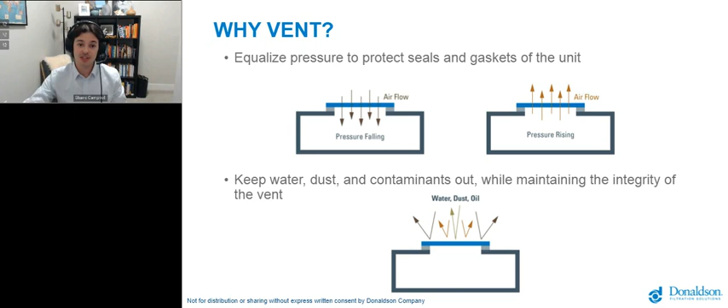So why vent battery packs? With battery packs, there are two ways that you can build up pressure inside the pack. The first being from temperature change during charging or discharging the pack. The battery will heat up quite a bit, or also during elevation changes, you can get pressure differentials.

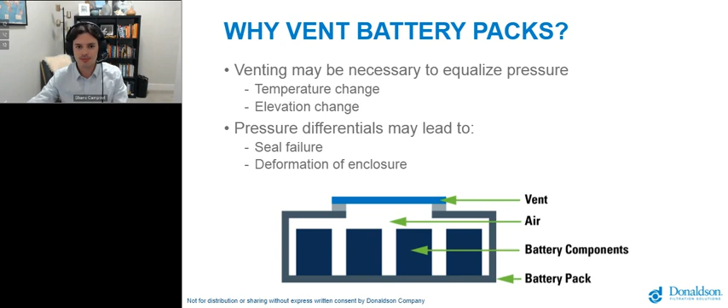If you don't have a vent on there, it'll either create high pressure or a low vacuum condition, and that may lead to seal failure or deformation of the enclosure, which then could cause failure of other components. So with robust venting, we're able to help decrease the risk of component failure and also seal failure.

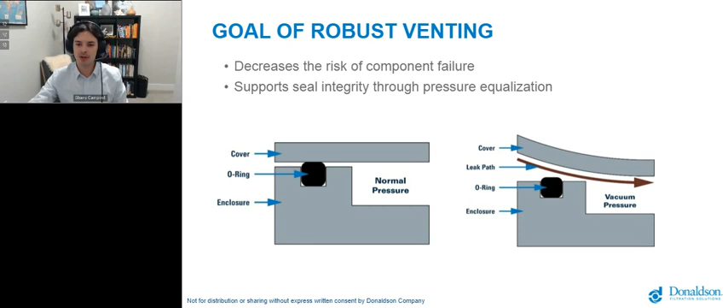In the diagram on the screen here, you see during normal operation, everything's sealed how we expect it. But if there is not a vent present and you create a vacuum condition, the cover can deform, creating a leak path around the O-ring or seal. So this is what we're trying to avoid, and the reason why we add vents to battery packs.

One use case we've been seeing a lot lately related to EV battery packs is all about the weight of the components present. We know that the battery pack is one of the heaviest, most expensive EV components, and one way to reduce this is to use thinner walls, especially the lid component. But with this, you also get a lower maximum pressure that the pack can handle.

So with venting, we're able to do two things. One, reduce the pressure that the pack sees during normal operation. And second, we're able to help keep that enclosure at a suitable pressure throughout its lifetime.

So it has a lot of really small nodes and fibrils which capture particles, and then through a combination of the material properties of PTFE and the oleophobic coating we apply to it, it repels both water and oil, while still allowing airflow to pass through.

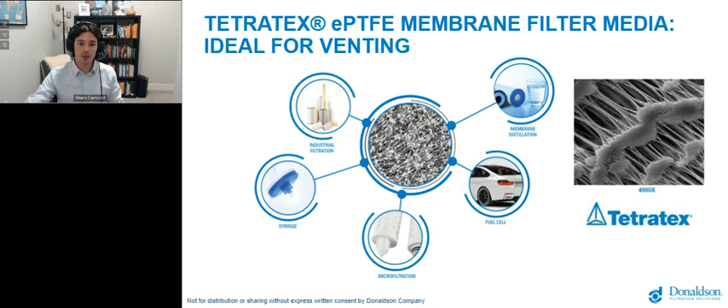This material is also used at Donaldson across other business units as well, for different filtration needs.

So now looking a little bit closer at automotive battery packs and some of the unique challenges we face with these, the first being thermal runaway.

Thermal runaway happens when there's an uncontrolled discharge of current within the battery pack. During this event, there's a rapid release of both gas and an increase in temperature, so we need a way to release this pressure quickly. The ePTFE membrane by itself is too restrictive to handle this amount of venting.

So we need some secondary function, and we call that active venting, which is the second stage of dual stage venting.

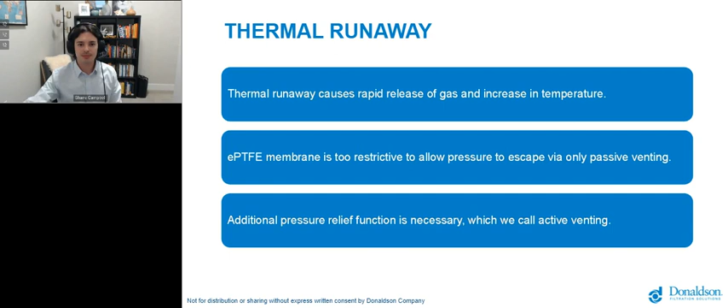At Donaldson, we have two ways that we're able to achieve dual stage venting. The first stage is airflow through the membrane, that's pressure equalization. But the second stage, degassing, can happen in one of two ways.

The first being burst. Our product, dual stage burst, has a membrane where as pressure rises inside the pack, it pushes on the membrane, and with the assistance of pins on the cap, the membrane bursts at a specified pressure.

The second method is dual stage flex. As pressure is rising, building up inside the pack, it pushes on the vent, and we have an umbrella valve in there, which also opens at a specified pressure, allowing rapid degassing of the battery pack.

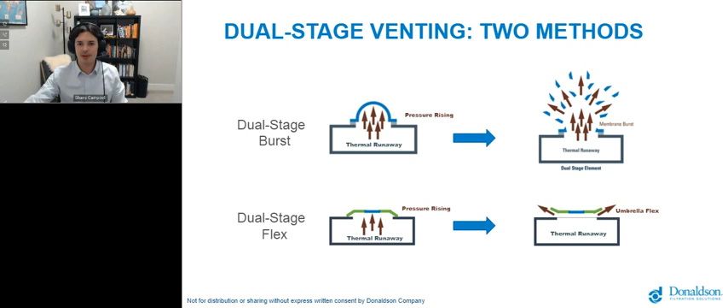So now we're going to play a video that highlights both products.

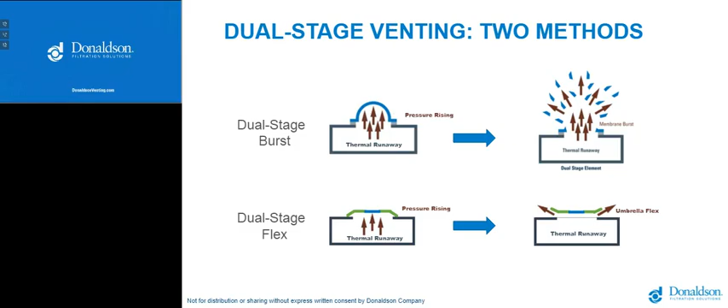All right, so from that video, there's a couple things that really stand out to me. The first being that dual stage venting is possible with two different methods. Whether you use a burst membrane or a flexible valve, you can achieve both passive and active venting.

Also, both of these products do offer a high level of ingress protection. They will help protect against water ingress, but they are not suited for an extended period of time submerged in water. And then also with both products, there are many options available for mounting.

Whether you want to mount to the side of your pack or the top of your pack, we can help you find the ideal location.

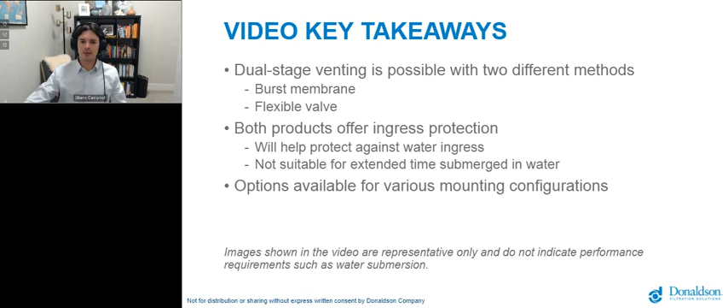I'm actually expecting quite a mix across the board, for people who do use vents for their battery packs, either single or dual stage. But really, I think most people do achieve dual stage venting in some manner, whether it's a combination of products. So I don't have many expectations for this result. I think it could be mixed.

Not quite. The I don't know is actually expected. I think unless you're responsible for that portion of the battery pack design, what type of venting is used is probably not communicated with the rest of the team. Or I suspect some people online maybe are not currently using battery vents, so that might be part of it as well. But I am happy to see that more people are using dual stage vents instead of single stage, because that really adds a lot more benefit for the health of your battery pack over just using a single stage vent alone. Very insightful, thank you.

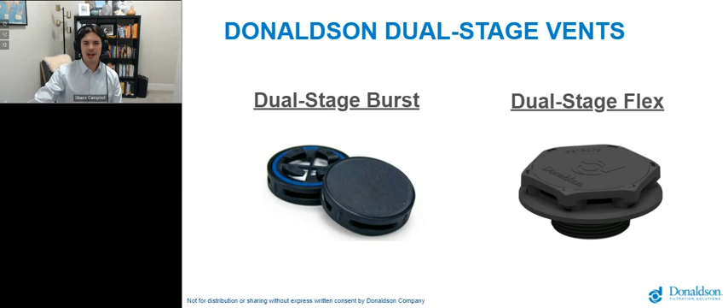The first, dual stage burst battery vent, is made possible by the Tetratex ePTFE membrane. This allows pressure equalization, airflow in and out, but also protection from water, dirt, and oil. It uses an injection molded plastic body, which protects the membrane from direct spray. We use an O-ring for robust sealing to the pack wall.

On this product, the retention cap has burst pins integrated in it, which help assist in the degassing function. This product is available with a quarter turn bayonet attachment. The benefit of this is it's a really ergonomic method to install it, and as you install the product, you hear a click when it's properly installed. But we also have this tooled up in a screw fit interface.

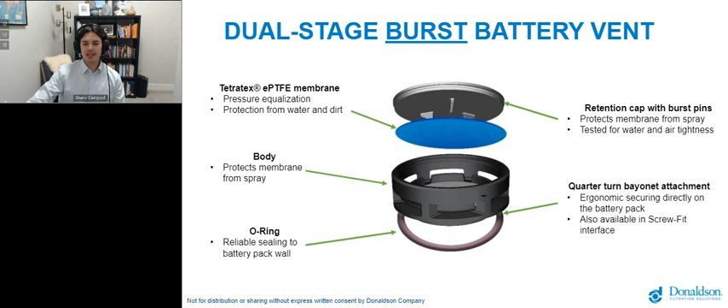Our second product, Dual Stage Flex, is our latest release and is now available. This product was developed because we had customers asking for a vent with a much lower opening pressure than we could achieve with dual stage burst. It offers the same level of ingress protection as dual stage burst, but through a different functionality: an umbrella valve. This design was optimized through CAE analysis, balancing the highest level of strength with high airflow so that during a degassing event, we can quickly get rid of the gases, while also balancing airflow with ingress protection, both from submersion in water and spray.

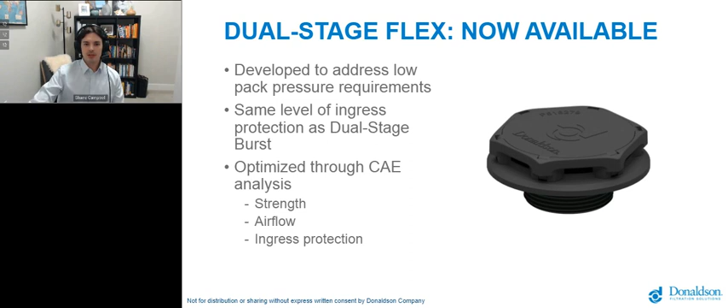The dual stage flex battery vent has a lot of similarities, and one key difference, compared to dual stage burst. It uses the same Tetratex ePTFE membrane, very similar body design, and the same O-ring sealing. One difference with flex versus burst is the retention cap: instead of having sharp pins to assist in bursting the membrane, we now have retention posts which hold the umbrella and membrane down to the body.

This product uses an elastomer umbrella valve. During normal operation, there's no airflow past the umbrella; all the airflow passes through the membrane. But as you build up high internal pressure, the umbrella will open, allowing rapid degassing. This product is currently tooled up with an M32 mounting thread. We also have a lock nut available if your pack wall is too thin to accept the M32 threads, which attaches from the other side. But this can certainly be tooled up in other mounting configurations, such as the bayonet.

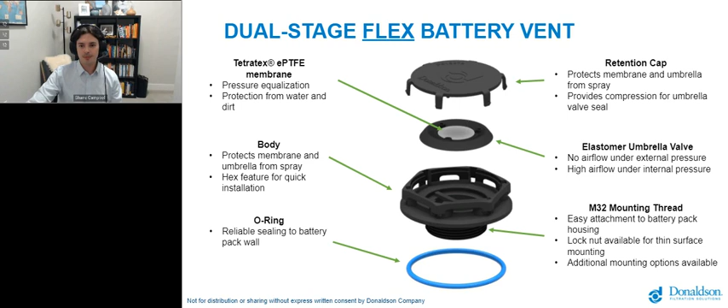Looking at the functionality of this part: during normal operation, airflow passes in and out through the ePTFE membrane in the center of the umbrella. Once you exceed the opening pressure of the umbrella vent, you get a direct path for rapid degassing, shown here with the blue lines. But as I mentioned earlier, if you have high external pressure, that umbrella valve stays tightly sealed against the body.

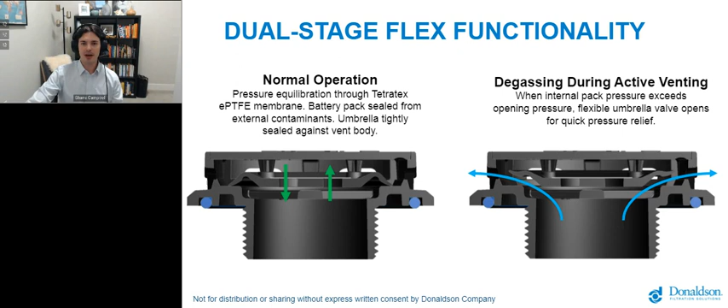So when you look at both products side by side, there are quite a few differences, and depending on your application, one may be better than the other. They both have a variety of options for attachment.

For typical airflow, referring to during normal operation where you have airflow passing through the membrane, it's a lot higher with dual stage burst, because we have a larger area of membrane in that product. There's quite a big difference also with the release pressure. Dual stage flex will open by 20 millibar, where dual stage burst opens by 300 millibar.

The degassing airflow are a little bit different as well. Dual stage flex gets about 15 liters per second of degassing airflow at 100 millibar, where dual stage burst, we can achieve 30 liters per second at 100 millibar. And once that membrane ruptures, it essentially creates an open hole that you can exhaust gas through very quickly.

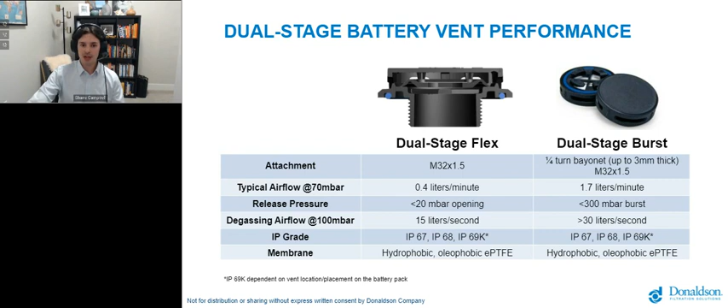Both products provide a high level of ingress protection, and they use our Donaldson Tetratex ePTFE membrane, which is both hydrophobic and oleophobic.

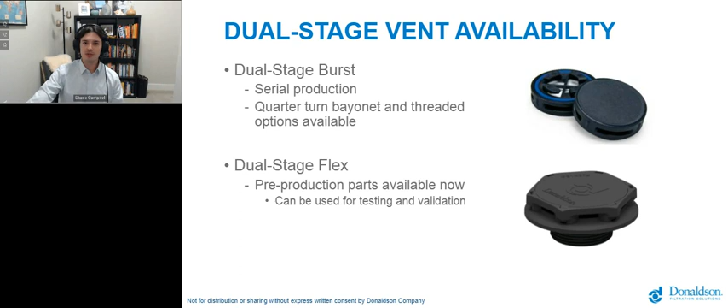In terms of availability of these two products, they're both available now. The dual stage burst is in serial production, and we have our quarter turn bayonet and threaded options available. Dual stage flex, we have pre-production parts which are off injection mold tool, and these can be used for any testing and validation.

So now I want to talk about the top 10 technical considerations that we've discovered at Donaldson after working on battery vents for a while now.

The first thing to consider is how venting assists in mitigating a thermal runaway event. The vent is there for pressure equalization, but it's also there to help get rid of those thermal runaway gases as fast as possible. So consider how much gas is being produced and what the desired flow rate is of those gases.

The second point, membrane permeability affects pressure within the pack. Depending on which membrane is selected and how much airflow it will allow, that will determine what pressure your pack will see during normal operations,

during heating and cooling cycles. Also consider how a lighter pack structure influences venting. As you go to a lighter pack structure, this often means a lower maximum pressure inside the pack, which also requires more venting.

With vents, consider the ease of installation. Where is the vent located on the pack? What method is used to install it? Does it require many tools, many extra components? And with our design, we try to make that as easy as possible.

The next two points go hand in hand, both the height and the weight of the vent. We try to get the most venting possible with the smallest space claim. We know how critical space claim is in your design, so we try to create the vent to be as low profile as possible, but also reduce the weight. We don't want a heavy mass sitting on a large sheet metal component that would amplify vibrations.

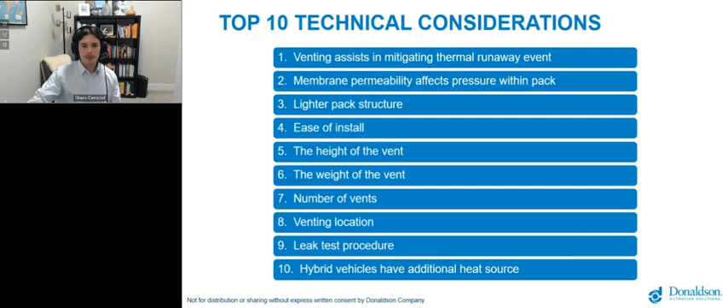So with venting location and pack design, we suggest that you involve a venting specialist early in the process. We can work with you to find the ideal location on your battery pack for a vent.

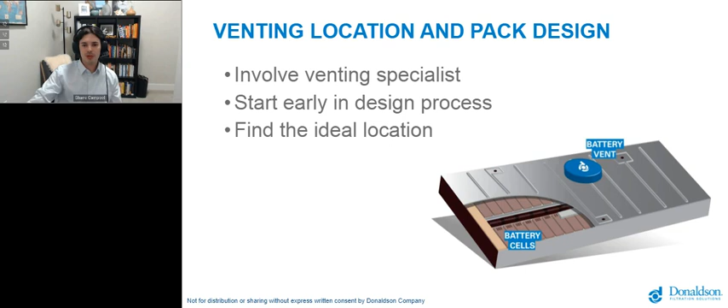With both of our products, they are designed for ease of assembly. As I mentioned, the quarter turn bayonet, as you install it, you hear an audible click, and we have multiple leg heights to accommodate different wall thicknesses. Also available with the screw fit, very easy installation.

And then if the pack walls are not thick enough to accept the threads, we can attach a snap nut from the other side. We have a unique design where if a special hole pattern is cut out, the nut can be installed from the inside, it will retain itself, and then the vent can be installed from the outside. And then both products, whether it's the quarter turn or the screw fit, can be removed and replaced with the help of a special tool.

At Donaldson, quality assurance is very important to us, and the way we achieve this is through our automated line for assembly process, through the media welding. We also have an online 100% WEP test to ensure that these are watertight. There are visual camera checks to ensure that the cap is properly installed and the O-ring is installed as well.

And then through quality assurance, we do sampling of our parts to make sure that they are meeting critical dimensions, the release pressure is what it's specified at, that the water entry pressure is high enough, that we get enough airflow through it. And then finally, our Donaldson plants are IATF certified to the automotive standards.

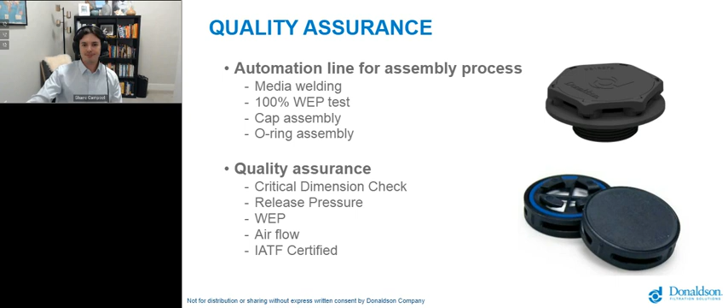So just a few points on Donaldson as a partner and the value that we bring. We are truly a global company. Whether it's R&D centers, distribution centers, or manufacturing plants, we're located across the globe, so we have someone close to where you are. Donaldson has a strong knowledge of battery packs.

Our engineers spend quite a bit of time keeping up to date on the latest industry trends and how that impacts venting and the needs of our customers. Donaldson has full ownership of both the membrane development and manufacturing. So one unique thing I've seen with this is as the engineers talk with customers and find new requirements, we're able to communicate that back to the R&D chemists and engineers who make the membranes themselves, and we're able to use that to come up with the next generation ePTFE membrane.

Donaldson is a trusted supplier in the automotive industry. We support powertrain venting. We have mini vents out there for sensors and other automotive applications. We have tested and validated products at all stages of the product development cycle. We are testing and validating our products to make sure that they are meeting the specs that we require and that they will protect your battery pack.

Donaldson is very much so willing to partner. If you have a unique application, we can help you find the right product, and then in some cases, we can make a custom product unique to your application. And finally, Donaldson is constantly looking for new ways to innovate and improve our products.